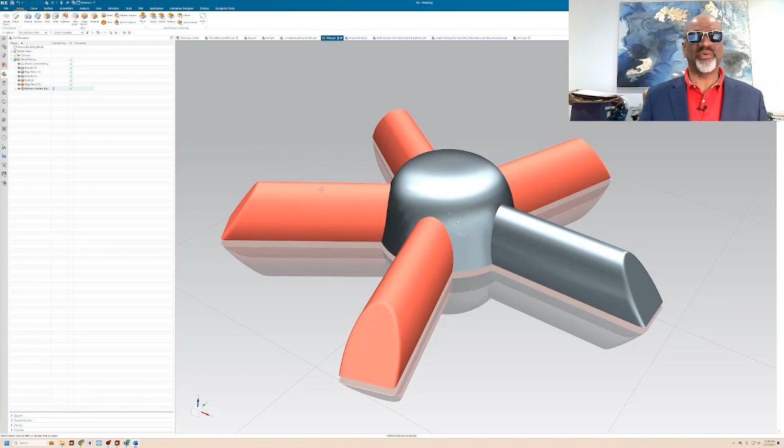The title of this talk is How Not to Lose Your Job Due to AI. A lot of folks are afraid of AI, and a lot of people don't know what its impact is going to be. And I think we're all in the dark. But what we do know is that if we embrace this technology, it can be very, very powerful.

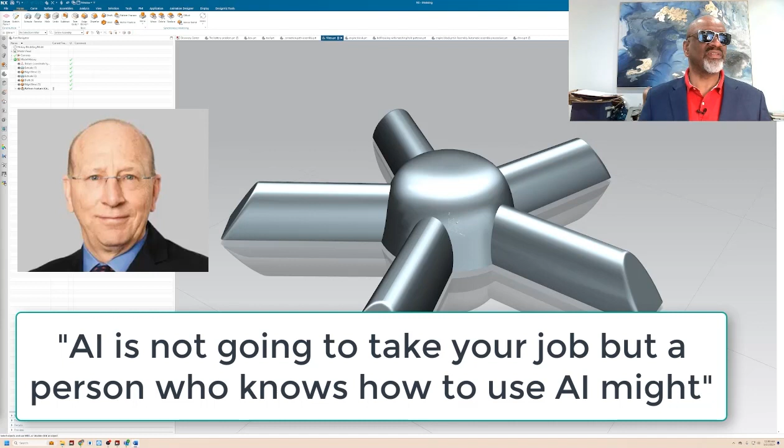There's no going back. There was an economist named Richard Baldwin from the Graduate Institute of Geneva in Switzerland, and he said that AI is not going to take your job, but a person who knows how to use AI might. And the fact is, artificial intelligence is here to stay, and when we embrace the power, there's ways that we could look at it with a positive viewpoint and a positive thought process.

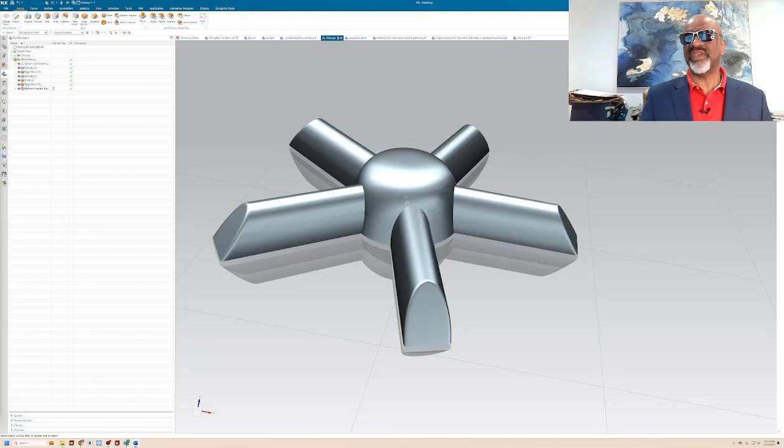There's a lot of different things going on within the design community and design tools that are powered by AI. So I've got a few examples of that for you today, and hopefully we can look at AI as something that's really positive and amazing. So for one thing, AI gives you a fantastic ability to do iterative design. A lot of really great inventions come from iterations upon things.

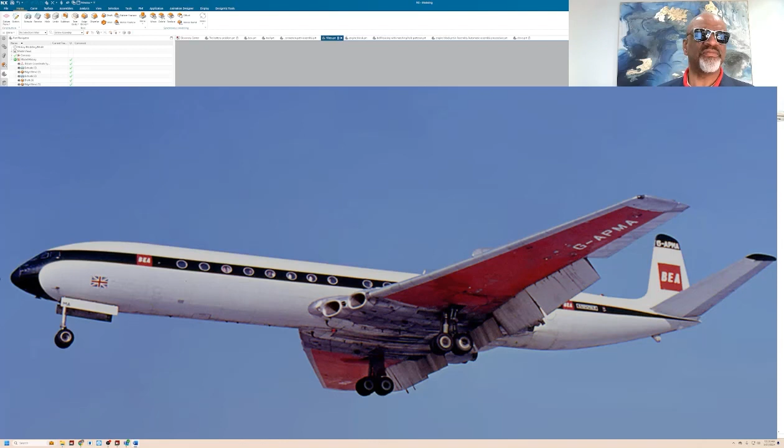And, hearkening back to certain things that would have been improved by AI. For example, there was a jet plane developed by the de Havilland Company back in the 50s, and it had 4 jet engines, and it had a pressurized cabin. Here's a little picture of it, and to the surprise of the passengers, 2 of them exploded due to fatigue. And fatigue is a very real and very important concept in aerospace.

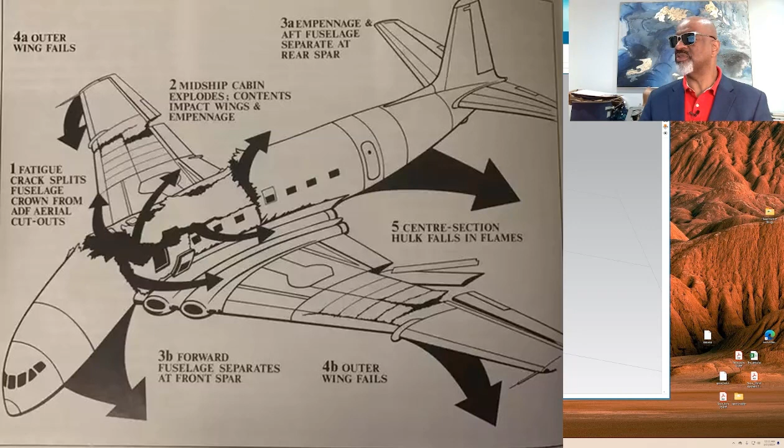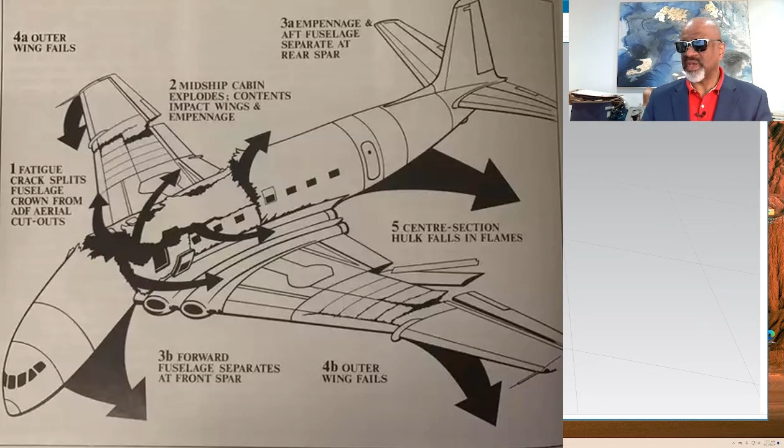The 4 jet engines powered this thing, and it was going so fast that there was more stress on it than on planes before that. And so the fatigue wasn't that well understood. That's why 2 of them fell out of the sky, because of cracks that came with fatigue. So the iterative ability of artificial intelligence and all the simulation that we could do, if it were only applied to that plane, maybe those lives would have been saved. So artificial intelligence gives you the ability to iterate like crazy on something.

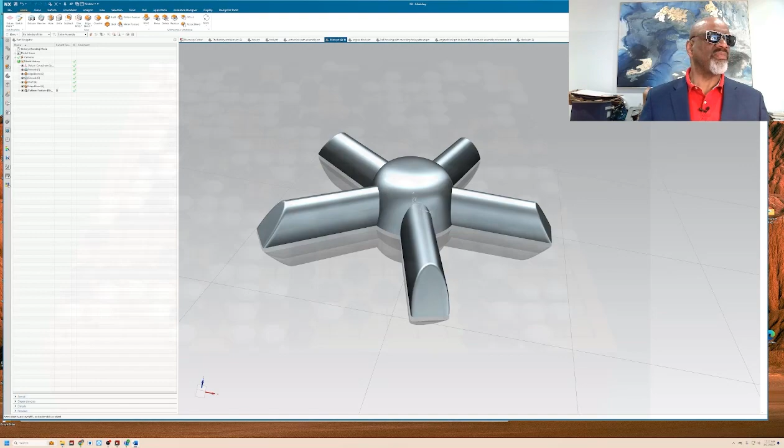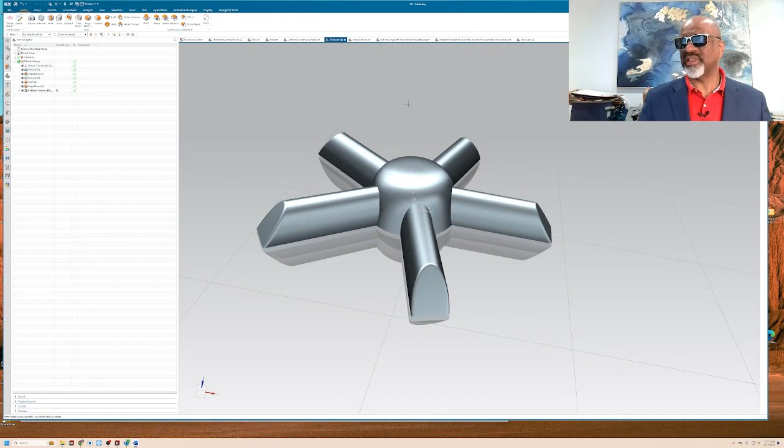There's a game called Go. And in Go, there are many moves that you can make. As a matter of fact, there's more possible combinations of moves than there are grains of sand, I'm told. And recently, within the last few years, there was a match. The most amazing Go player on the whole planet was pitted against a computer using AI, and the AI learned how to beat the human, and everybody got all excited about it. But the thing about AI is it can iterate like crazy, almost at the speed of light. And so there's design abilities that you can get from that.

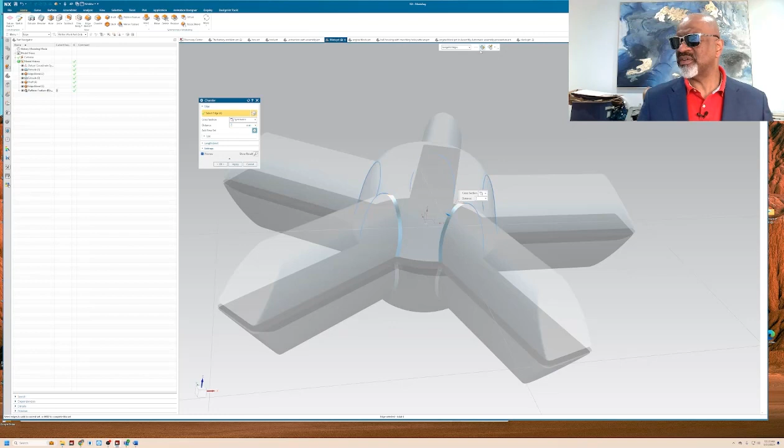So here's a little example of how AI can affect design. I've got this little piece of geometry. It's nice and smooth, and I want to put a radius on these edges here. And what AI does is it says, oh, the edge that you selected is very similar to all these other edges, so all you've got to do is press the button and you'll get all of them. Oh, these are chamfers. That's an example of how AI is changing the ability to design.

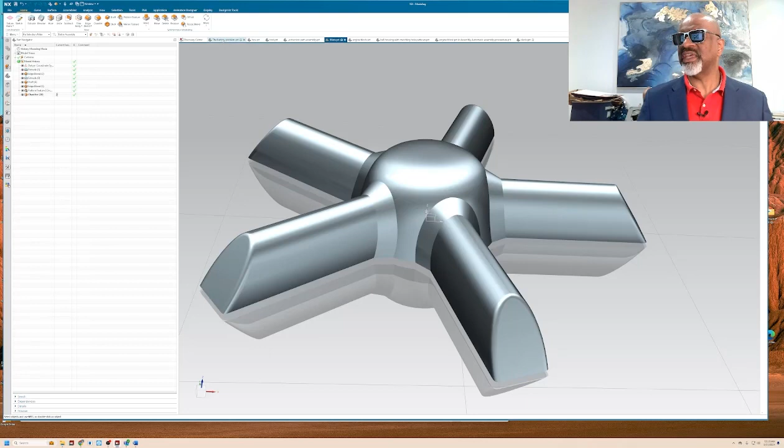Maybe a better example is one that I took from a real life situation where there was a person who was designing a rectilinear battery. And the battery was supposed to fit inside of this odd kind of eggy shape. And this person was iterating upon the battery. If you think about it, if you make the battery long, you're going to make it have more volume.

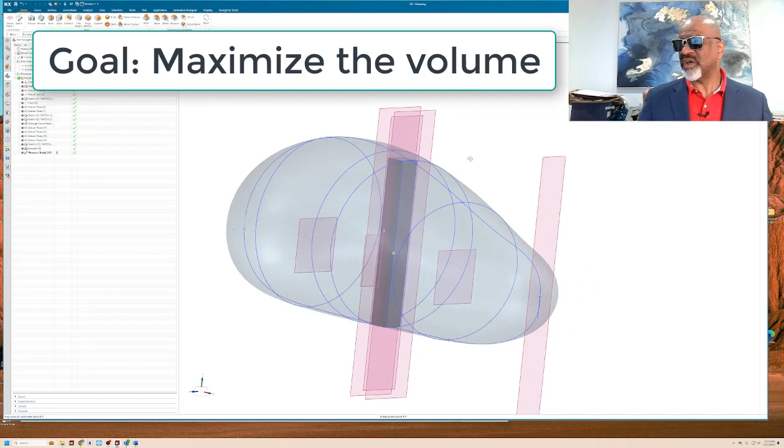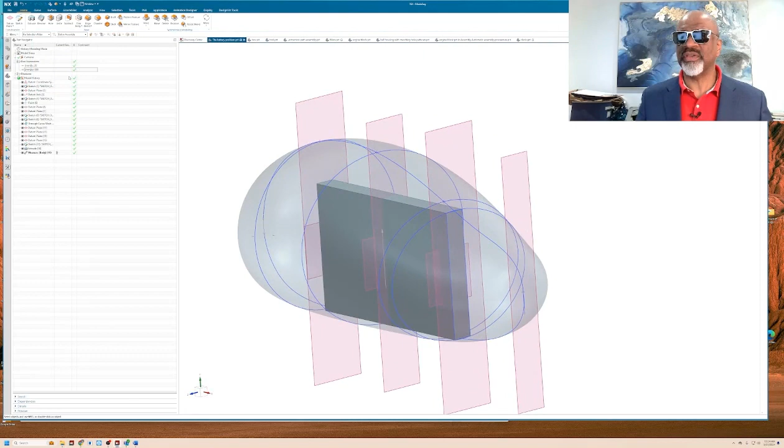The objective was to maximize the volume of the battery. And so if you make the battery long, then what you get is, let's show you, make it 200, a long, thin battery, because the battery can't be outside of the surface. And if you make it wide, you can maximize the amount of volume of the battery. But if you make it really long, then it'll feel these surfaces, and then it can't get as high. So for an example, if I make it 300, you can see now it has to neck

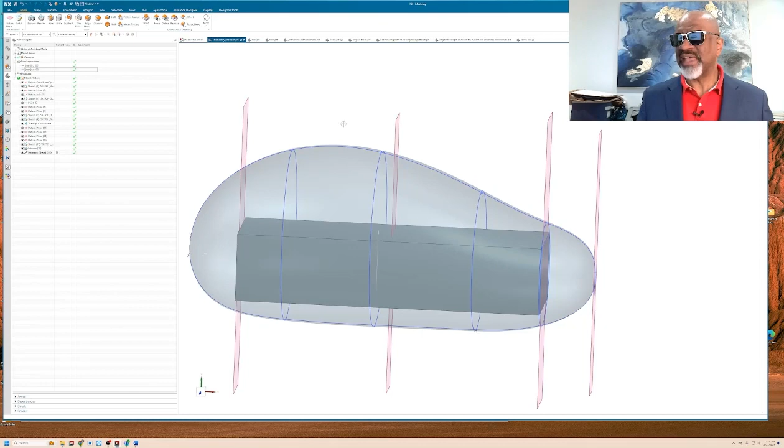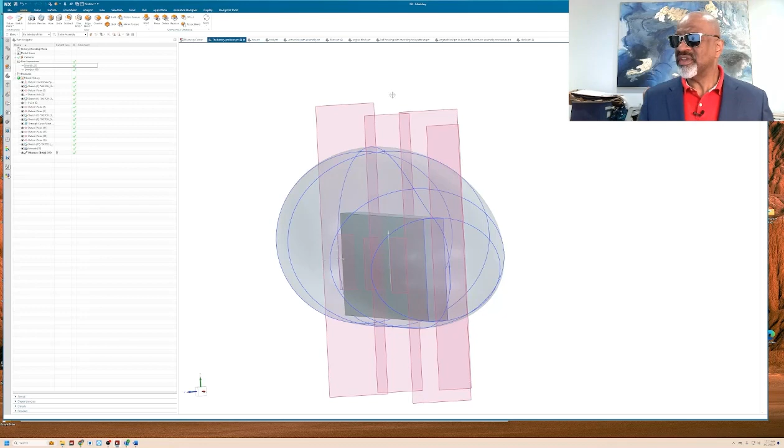down a little bit. So the optimization of this volume to make it as volumetric as possible is a matter of iterating upon the overall length of the battery and then the overall width. When you make it shorter, or I guess less wide, you can make it higher. See? So the optimization of this battery is a matter of iterating upon the length and the width.

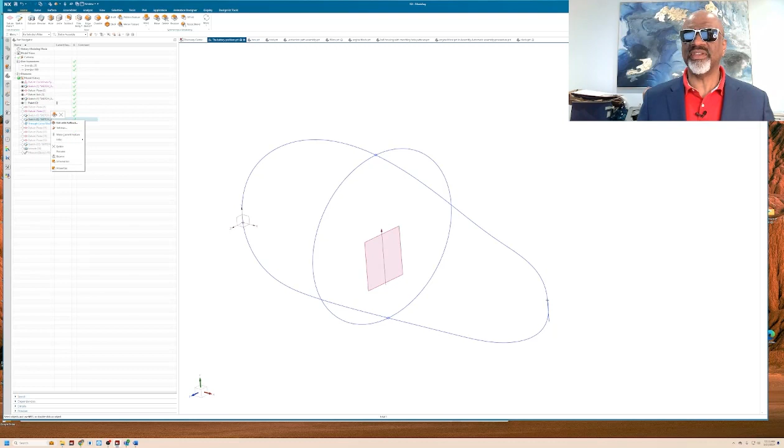So what I've done here is I've created the basic shape. Let me just turn the model back in time. Make current feature here. So the basic shape was made with these entities: this sketch and these 3 sketches. And I made a surface out of those using a through curve mesh surface. And then I made a datum plane that was at the end. I made a datum plane that was right in the middle.

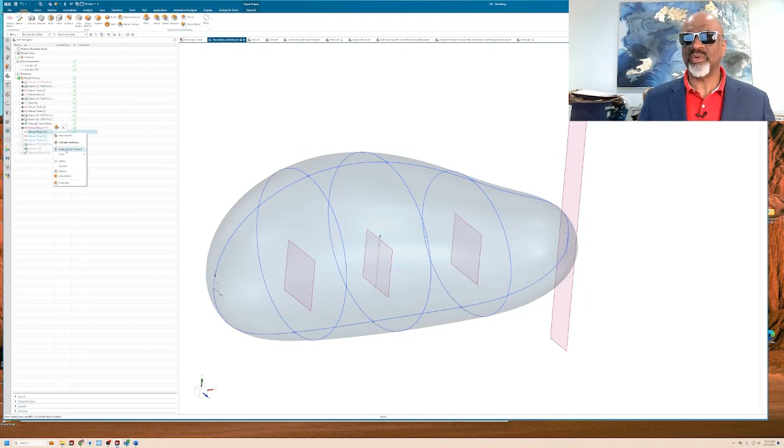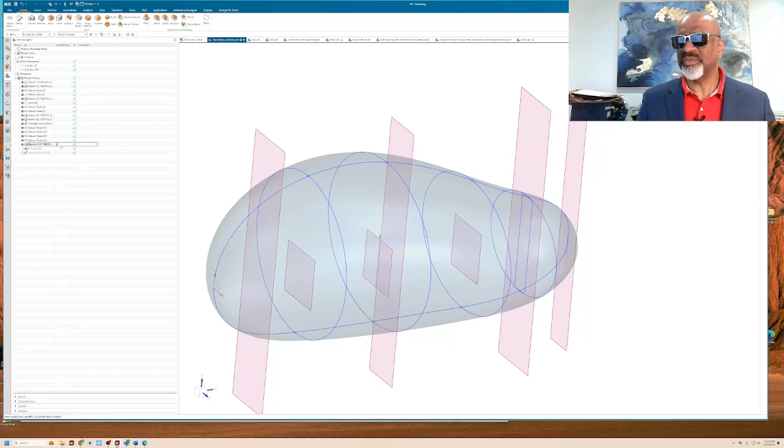And then from that datum plane, I made 2 other datum planes that were controlled by a variable. As you can see, if I go to the expressions editor, you'll see that there's a variable b and there's a variable w. So w is the width between 2 datum planes. And then on the datum plane at the far end, I made a sketch. Let's make current feature. There it is. I made this sketch right here. And this sketch is then controlled by a variable b.

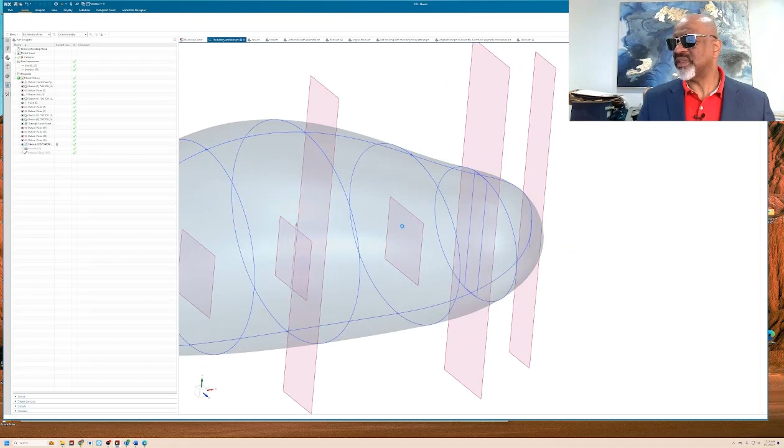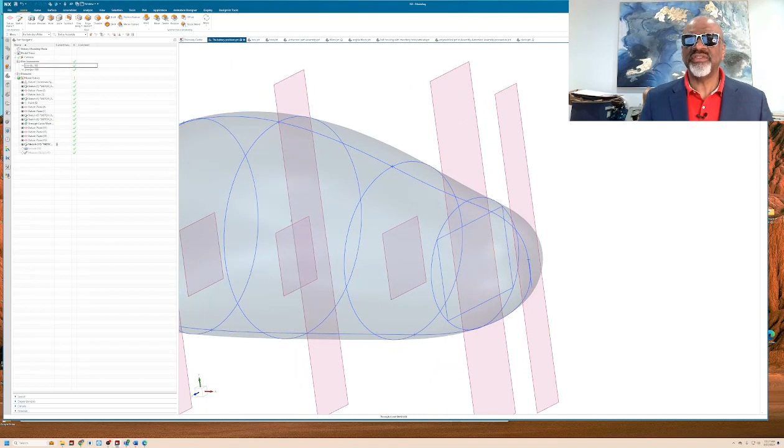So as I change b, the sketch can get wider, but it fills the cross section of the shape. So as it gets wider, it gets shorter. Let me show you that. I'll vary the width. Here's the width, b. If I make it 40, as you can see, every time I change the width, it's got to fill this elliptical shape here. Let's make it 100. And it has to get shorter. So then I just extruded that to the next plane. So it makes a rectilinear battery.

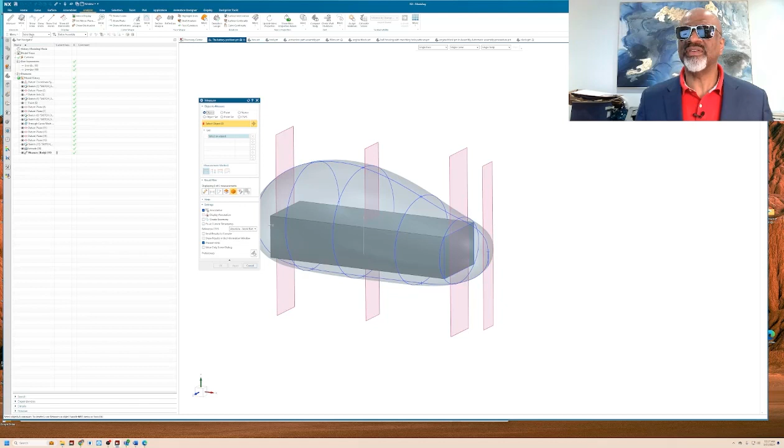Okay, so great. So now I did a measurement. I just went into analysis and measure. And I did an object. I set this at solid body. I said body, and I did associative, and I selected that object, and I said OK. And when I did all of that, I got a measurement expression that I called volume. So here it is. So I've got the volume of that shape.

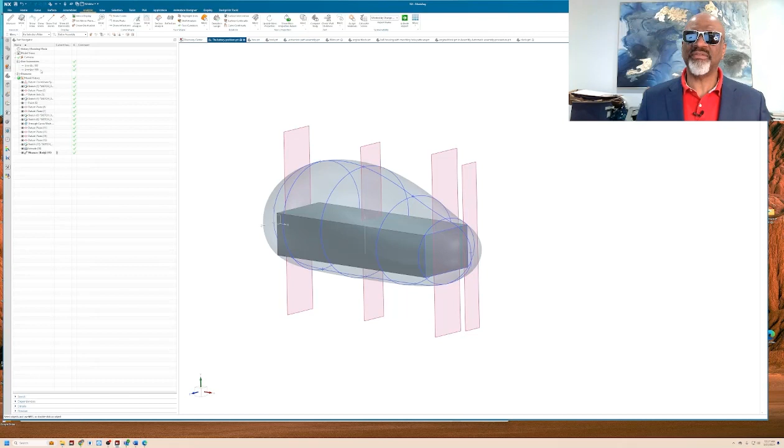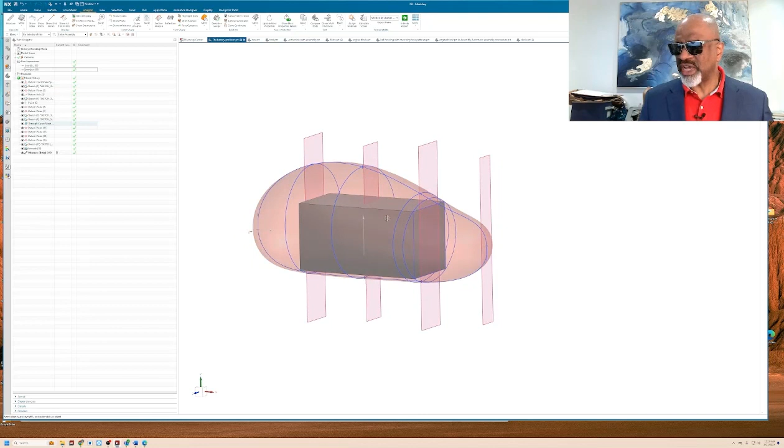So if I didn't have the tools that I have, I would select different numbers for the length, which is w, and b, which is the width of this inscribed rectangle, and I would continually check the volume to see if it's any greater. And I would go back and forth, and it could take me a very long time to do that.

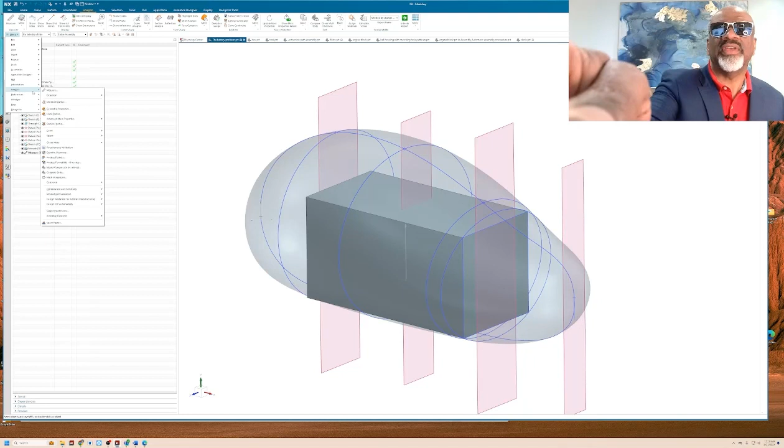But because of artificial intelligence, because of the way that I can iterate so quickly with a CAD tool, and this is an old technique, but it's still in essence an artificial intelligence technique, I can do that very quickly. And here's how I do it. I say menu, analysis. Get this out of the way here. Menu, analysis, and then I do an optimization.

I give the optimization a name, like max vol. Hit enter, max vol. Okay, oh, it doesn't like that special character. So I'm going to call it max voll, 2 L's. Okay. And I make sure it's highlighted. And then I click on objective. And my objective is to maximize, here's maximum.

And what I'm maximizing is that volume. So I click on volume there and say okay. So that's my objective, is to maximize the volume. Then I go to variables. And my 2 variables are B and W.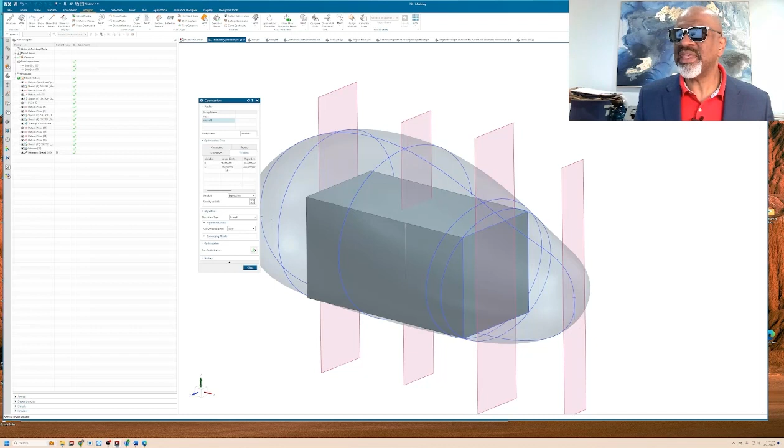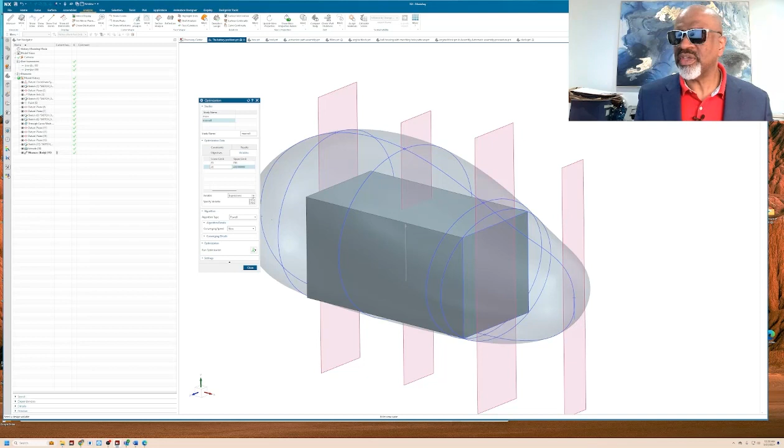Okay? Now, I've got to guess pretty well at the ranges. So my B range, the width of this little inscribed rectangle, let's say it'll start at 20 and it'll max out at maybe 200. And the width, the W, the distance in between these 2 planes, which is really the length, will start at 20 and will go all the way up to 350.

This thing's 400 millimeters long, so 350 gets this shape to the very end where it has to get really thin. So there's my numerical values that I hope, as they get iterated upon very quickly, will produce a maximum volume of this battery. So now when I hit the run button, as you can see, NX will try a bunch of different numbers, and there it goes.

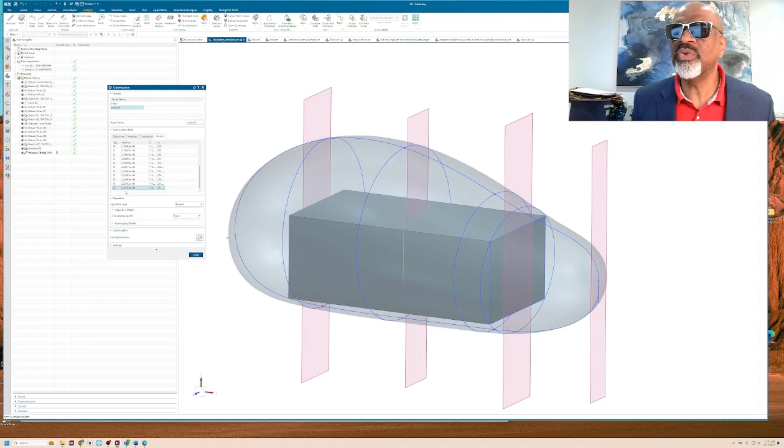It settled upon 2 numbers, so I was basically optimizing 2 variables at the same time. And as you can see, B is 119 and W is 221. And that is the maximum volume that you can have, which is 2.27 times 10 to the 6th millimeters cubed. And so that's how you maximize the volume. And as you can see, it iterated like crazy. So that's a really neat and powerful tool that has been there for a while, but it's still, in essence, artificial intelligence.

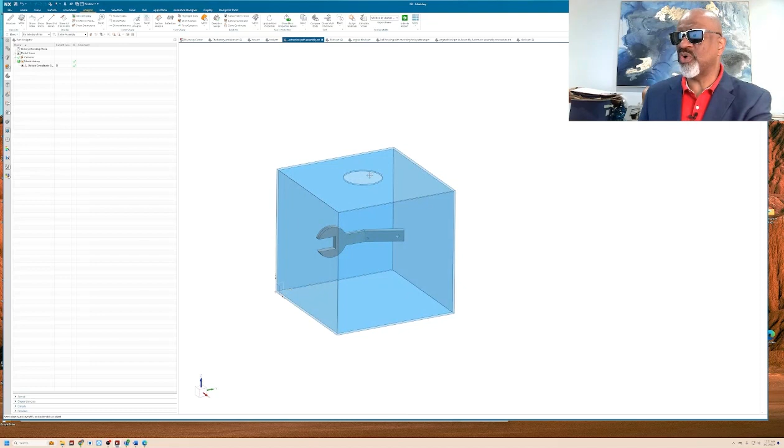Here's another example. I have this box, and in the box I have this wrench. And what I want to know is, what's it going to take to make this wrench come out of the box? What's the path that the wrench has to follow? Obviously, if I take the wrench and I move it straight up, it will collide with the top of this box, which has a hole in it that's only a little bit bigger than the lug of this wrench. So the wrench has this shape.

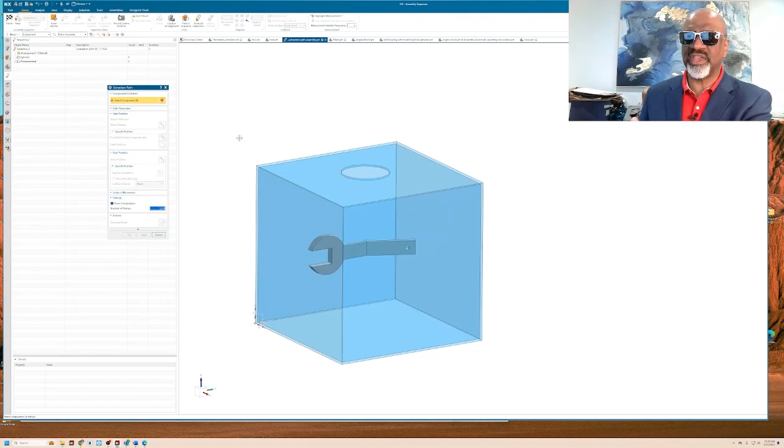And what I could do is go to the assemblies tool. And within assemblies, there's a command called sequence. And assembly sequences is really powerful. And what I do is I do a new sequence, and I'm going to do an extraction path. And the extraction path is here. And it's warning me that when I use extraction path, it's got to take away the mating conditions. Okay, great. So now it says select the component that I want to calculate the extraction path for.

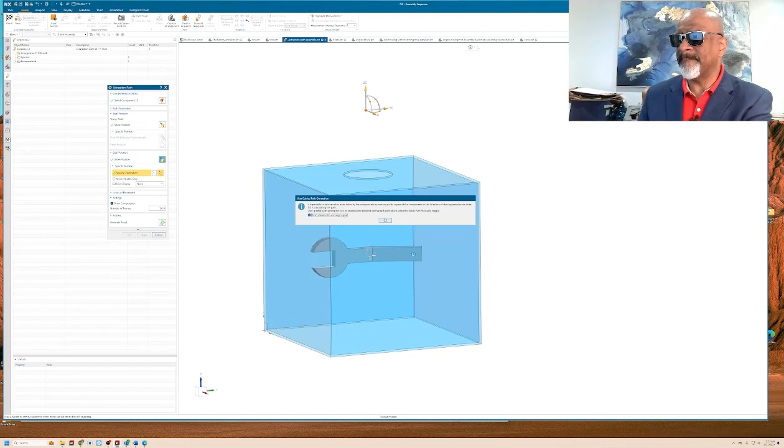And what I need to do is show the position that I want this piece of geometry to end up in. So I want it to end up there. Okay, so great. So now I've shown it the position, and I can go ahead and say generate path and say okay. And what you'll see is it's iterating a bunch of times to see what it will take to make a path for this. And you'll see that we can animate it, and it'll be really smooth when it gets done,

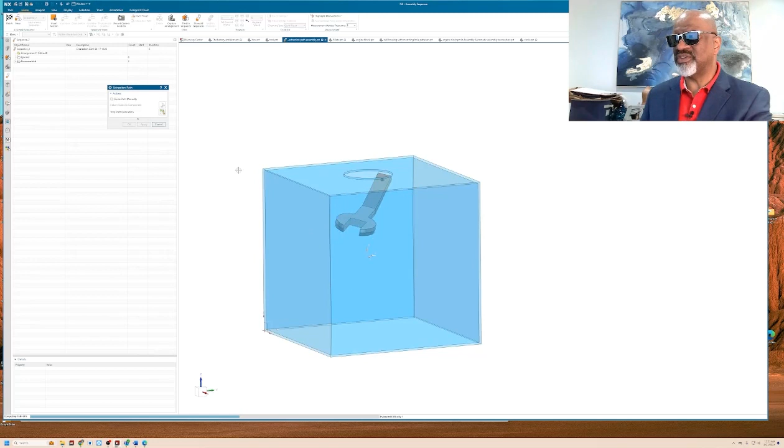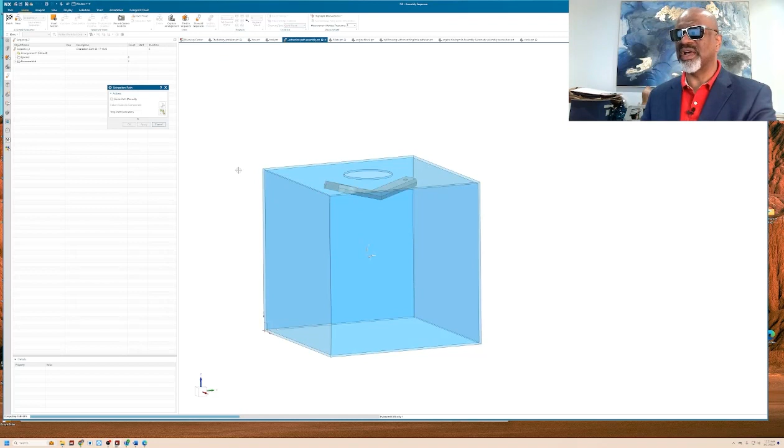all these iterations. So right now, it's going through a million different gyrations and hitting the top of that box and doing this much faster than I could as a human being. The fact that it does this automatically means that I can let this go and walk away, and pretty soon it will generate my path. So it is certainly taken its time, but what it's doing here is really a lot of iterations all at once. Looks like it's almost there.

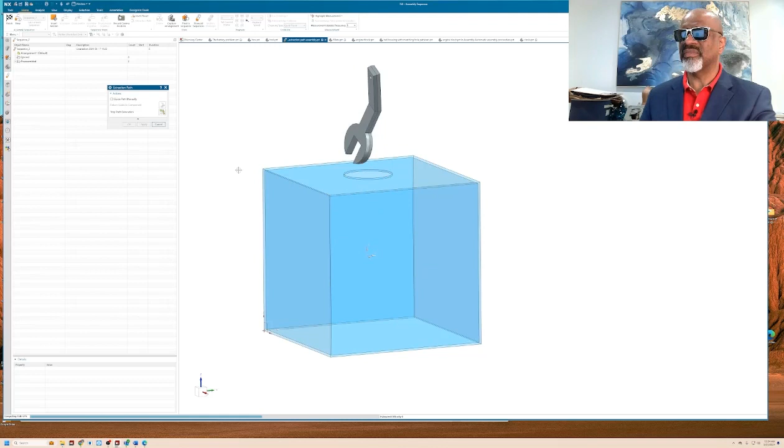There we go. All right, so now after having done all of that craziness, it's like that old adage of a million monkeys on typewriters, eventually they'll type out world peace. Not world peace, War and Peace, right? Tolstoy's War and Peace. I guess it's Tolstoy. So here we go.

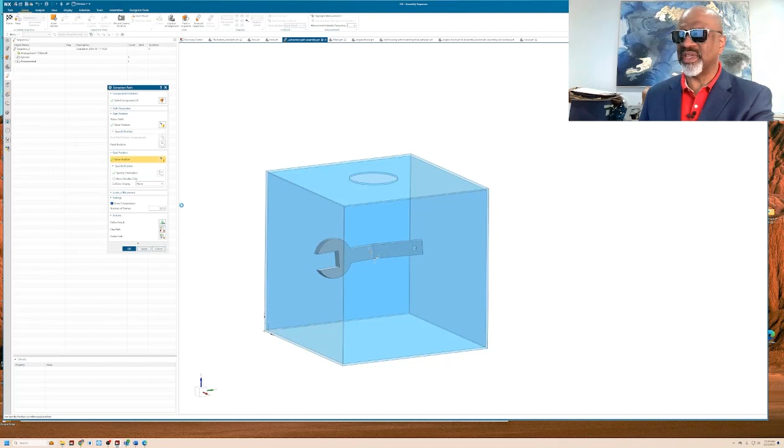So now that I've created that extraction path, you can play it. And this is what the wrench has to do to come out of that box. There we go. It's got to make a nice little turn. So NX figured that out on its own, and that is artificial intelligence. Fantastic.